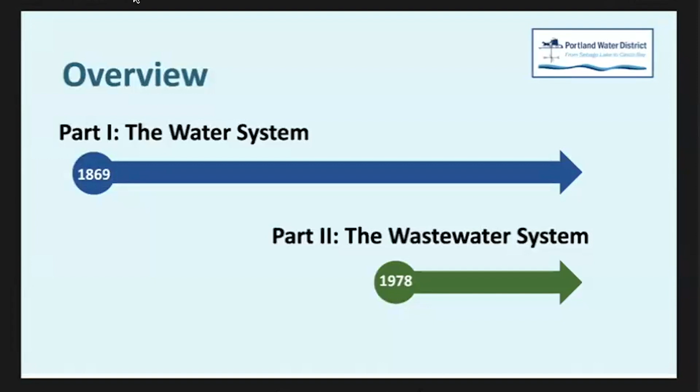Whereas the water, you'll see, started really being a thing in the 1860s. So here, I'll talk about our water system. The water system that we all drink from here in Cape Elizabeth originates at Sebago Lake. Raise your hand if you knew that your water is from Sebago Lake. That is so great, because we are so fortunate.

And by the time I'm done, if I do nothing else tonight, I want you to leave saying, wow, we have got the best water system. In fact, this is true. EPA was here 3 weeks ago to do an inspection, and they said there's nothing wrong, we just do this periodically.

It had been like 20 years since they had been here. They spent a week, 4 people, 2 from Colorado, 2 from Massachusetts, asking a million questions, touring everything. At the end, one of them said, 'I've been at EPA for 35 years. I've been all around the world. This is the best water system I've ever seen in the whole world.' So that's not me talking, that's EPA.

So I hope that I can convey that well enough so that you feel good about that when you leave. The history of drinking water in Greater Portland, if you go all the way back to the 1800s — we have newspapers in our archives, and you can read the discussions that happened.

By the way, it's amazing, if you ever read old newspapers, the debates they had. They're pages long, where people are conveying, this is my position on this, this is my position.

In the 1850s, Portland—and when I say Portland, I really mean the peninsula, that was really what Portland was, Deering was a separate community—the conversations you can read in the old 150-year-old newspapers were about the city of Portland having grown big enough on the peninsula that the water systems they were using, which were really like rain barrels and cisterns—you might brick up an area in your basement and convey the water off your roof down a gutter, a spout into your basement and collect water there, and that's the water you used—by the 1840s, 1850s, it was clear the population had grown enough that this was inadequate, not a great way to provide water for a community of this size.

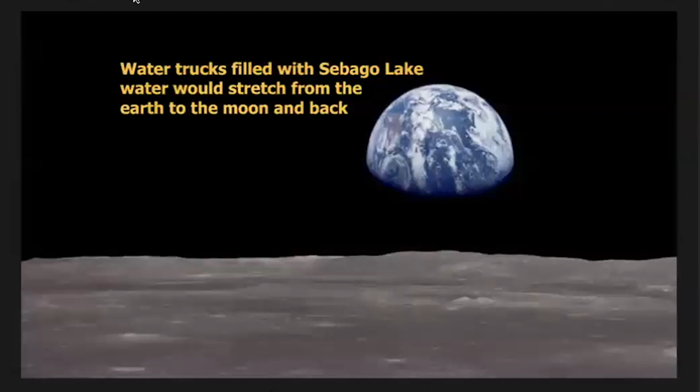And that seems like a big number, right? But it still doesn't really help me that much. I don't really know how much that is, I can't picture it. So what if you were to take all those trucks, 100 million of them, and line them up end to end? How far would it go? Now you can take a guess. How far do you think that line of trucks would travel? The moon - okay, that is a great guess. It would extend from the Earth to the moon and back twice.

So it's just an enormous quantity of water, and they were right in 1866: if we get the water from Sebago Lake, we will never be needing water ever. I'll tell you a little later about how much water is in reserve based on how much we use today. But if you ever pick up the newspaper and it says Portland struggling with water quantity, just know Armageddon has happened, because there's just no way that should ever happen. In fact, what will happen long before that is you'll be reading about Boston, Bangor, other cities looking to Sebago Lake for water. That will happen long before.

So that's not something we just never had. You can lay awake and worry about other things, but you do not need to worry about the quantity of water in Sebago Lake.

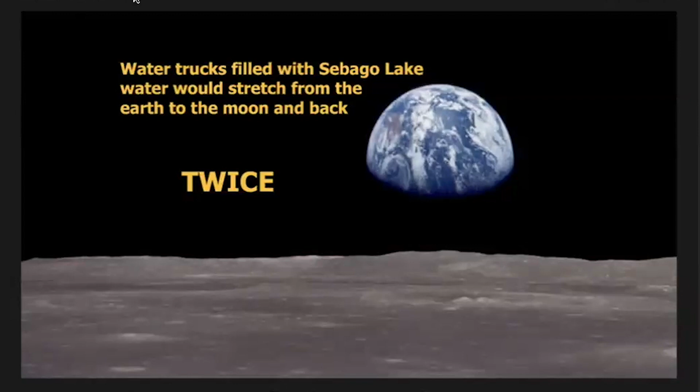When you're next at Bissell Brothers or one of those trivia nights, this is the best trivia question: when did water first flow from Sebago Lake into Greater Portland, and where did it go first? Here's the answer: it was Thanksgiving Day, 1869, and the first water tap was at 94 Danforth Street, which, by the way, there's still a building there, the same building is still there. Don't know why they chose that tap to open first, but that's where it happened, on Thanksgiving Day, which is, again, isn't that a beautiful bow on the whole thing?

Aren't we thankful? And by the way, one of the great things about working for a company that's been around so long is you have these ancient records. You can go up into the attic and your wife will text you and say, when are you coming home? Because you get down there, it's like a rabbit hole and you just keep on finding things.

And here is the first service card, these handwritten cards that tell you that this was a galvanized service, 3/4 inch, installed in 1869, 47 feet long. That's service number one - see the one up there in the corner.

We still have that card. And there's the building as it looked long ago. That's how it looks today. It's still there, and that service has been renewed a number of times. Again, that's more detail than you want to know, but there it is, the first water service in Greater Portland.

The first system that the Portland Water Company constructed—remember the fire was 1866—and the system started operating in 1869. So it took 3 years to build.

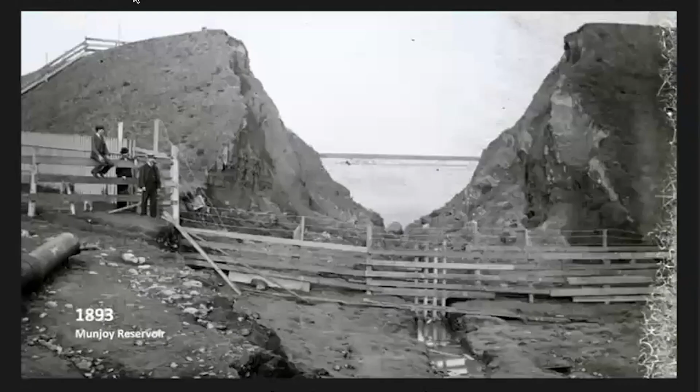So as I said, I feel bad a little bit for the poor Portland Water Company, but the most infamous thing that ever happened was the Munjoy Reservoir burst. This was in 1893, and it's a tragic story.

You can read about it if you Google it. There was a man walking along the base of this earthen dam, and he saw that it was leaking and getting worse, so he started running from home to warn people. While he was doing that, it burst and rushed down and washed away houses, including his own. Three of his family members were killed as he was running around telling other people to evacuate.

I was upstairs in the attic one night, missing dinner, and I found this ledger from the Portland Water Company that we still have—blew the dust off it. And I found this entry where they paid $6,600 to the family for damages, to settle claims related to this terrible tragedy.

You can just see it wiped out all of these buildings down below. It was rebuilt and refilled and used again for many, many years.

Okay, so that's the sort of the prehistory. I haven't even got to the Portland Water District. If you read the newspaper accounts around 1900, 01, 02, 03, there's a huge debate going on between advocates of continuing with a for-profit water company and others who said water is really a community thing. It really shouldn't be a for-profit thing. Why would anyone be profiting on drinking water? It should be owned by the public, managed by the public. And this debate went back and forth.

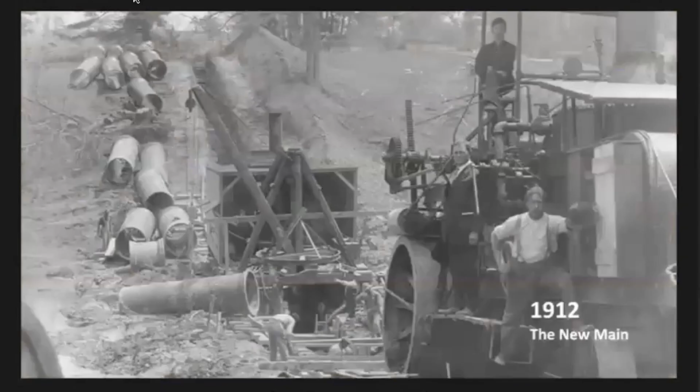But things are changing. Another irony, the water district was created because it was felt we needed to be able to fight a fire if it broke out. When the district took over and engineers evaluated the capacity of the system to move water, it turns out that the system could move about 10 million gallons in a day, and we used 9 million gallons as a community, meaning we didn't have millions of gallons in storage if we needed to fight a fire.

So it really wasn't adequate. One of the first big projects, which dominated the annual reports for several years, was the new main. It's referred to as the new main under construction. And this is a picture of the new main. It was finished in 1912.

It took almost 4 years to replace, or actually augment, the existing transmission main with this 42-inch cast iron main that went all the way from Sebago Lake into around the Capissic Street area. That's like one of the main trunks of the system.

Here's a picture of it coming through Gorham. Looks like Vienna sausages. I love this picture with all the lengths of pipe being dropped into this trench. The new main, by the way, we call it the 42.

And I say we call it that because you're still drinking out of it. This water main is still in service, still in great condition when we have to work on it. One thing I'm very impressed with is how engineers over the years really looked long-term and built things to last. This main is 112 years old, and we're still drinking out of it.

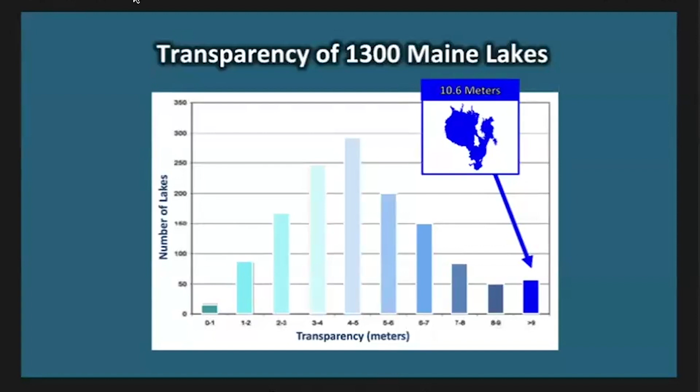Okay, so we do treat the water, but we didn't always. The Portland Water Company did not provide any treatment. It was just pure Sebago water from the lake into Portland. From 1869 until 1914, if you turned on the tap in Greater Portland, you just got Sebago Lake water. But in 1914, if you read the newspapers of the time, there was typhoid, there was cholera, people were dying. They had numbers on the front page of how many people died since the last edition of the newspaper.

It was never shown to be linked to drinking water. Milk was really the culprit, that's what the public health specialists of the time concluded. But you didn't really care that much in 1914, you wouldn't want to wait around for the debate. If you buried one of your children, you want something done. And so it was determined we should disinfect the water, we should add chlorine. So that began in 1914.

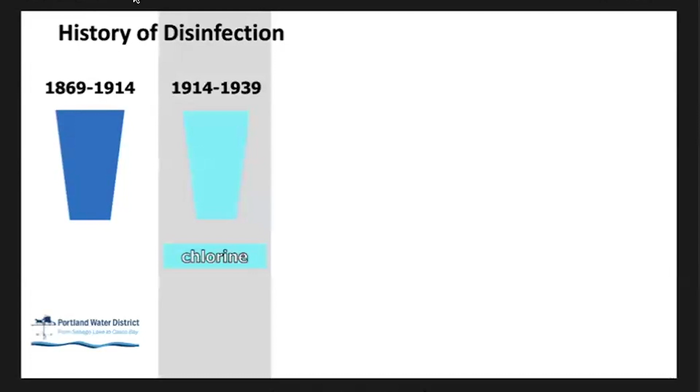From 1914 until 1939, chlorine was added to the water. In 1939, that changed. The treatment was upgraded and we started chloraminating, which is chlorine plus ammonia. You add both of them, they combine together. It's a more powerful disinfectant, has less taste and odor, and it lasts longer in the distribution system. So that's why we switched to that.

Many communities are switching to it now, but we were very early in doing that, in 1939. From 1939 until '94, that's what you got when you turned on the tap, chlorine and ammonia as your disinfectant. In '94, the regulations changed.

We learned that our system needed to be upgraded because of what they call emerging contaminants, new things that we didn't know about that are found out about, learned about, and then regulations change and they say, what you're doing has been good so far, but you need to do more.

So in '94, we added ozone disinfectant to the system. Now the water is pulled from Sebago Lake, we ozonate it, and then we still add chlorine and ammonia to carry through the system. That's how it was from '94 to 2014.

Then in 2014, we upgraded again for other emerging contaminants, in this case cryptosporidium. By the way, we've never found cryptosporidium in Sebago Lake, but EPA regulations say you must treat as though it's there. Because if we waited, you might ask why spend a lot of money to make your system more robust to treat for something not even in the source. It's because if we wait around until it's in the source, you will drink it and you could die. Some of these are waterborne diseases that can kill you.

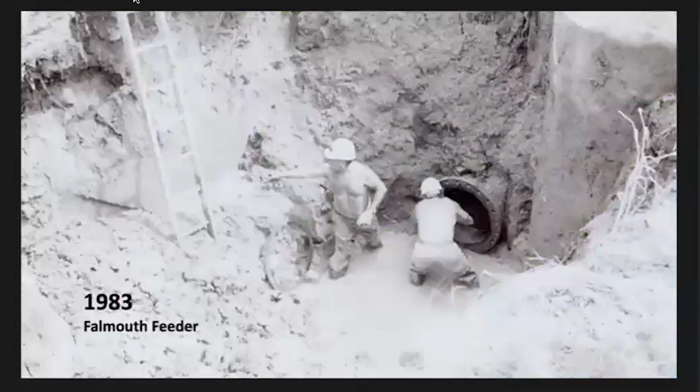We're still doing the same things that were done 100 years ago, but we have better tools now. How many years ago is this? 40 years. That's not acceptable anymore as a construction practice—they would be bracing in there, there'd be other things done. But in 1983, that's what working on the Falmouth feeder looked like.

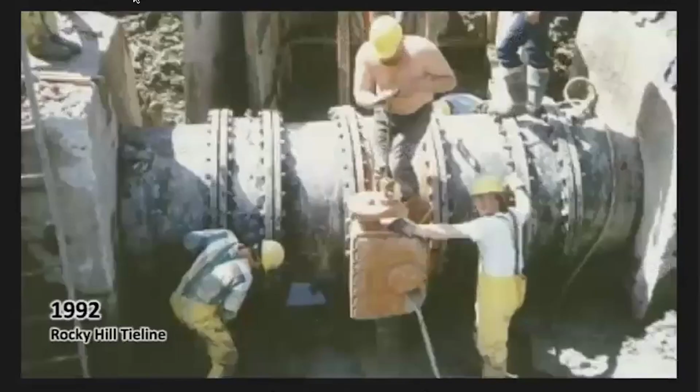This is the largest water pipe in our system—it's 60 inches in diameter. It's what we call the Rocky Hill Tieline, a pipe that connects. I mentioned we no longer use the Bramhall Reservoir, which has been paved over, and the Munjoy Reservoir, which is gone. Now our major storage is at Rocky Hill and Methodist Road in Westbrook, and this is the pipe that connects those storage tanks to the transmission main, so when you turn on your tap, you get water from here.

A big project we did in the 80s was in response to complaints about algae. In late summer people were turning on the tap and seeing green algae. We looked into it and learned that our two intakes into Sebago Lake, which pull water from the bottom, were in about 35 feet of water. The lake's transparency is such that light can get down even further than that, so algae can grow at that depth, and in late summer we'd draw in water with algae. It wasn't harmful, but it wasn't aesthetically pleasing. So we floated extensions out there and ran them out deeper into the lake, and now we draw our water from 85 feet instead of 35 feet. We haven't had an algae complaint in 40 years.

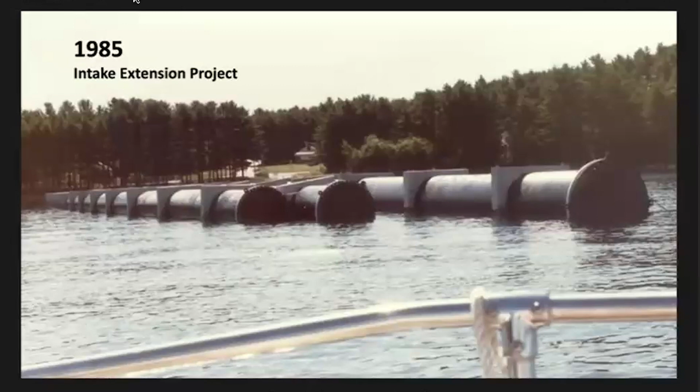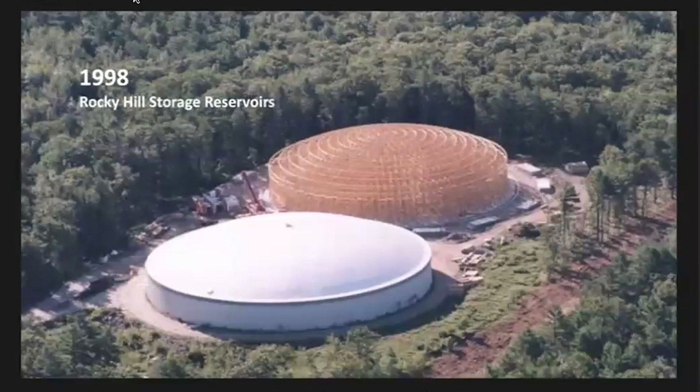This is an aerial image of the Rocky reservoirs, Rocky Senior and Rocky Junior—again, engineers named them, so they're not that creative. Each one holds about 9 million gallons, so that's 18 million gallons total, and we use 22 million gallons in a day. That's just a little bit less than a day's worth of water—that's how much we consume every day.

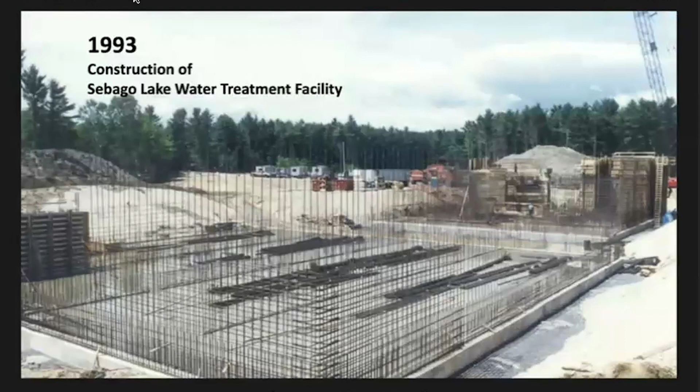So the last thing I'm going to share with you, I looked and looked for something very unique in Cape Elizabeth's water system history. Didn't really find anything that stands out, which is good. You don't want exciting water, right?

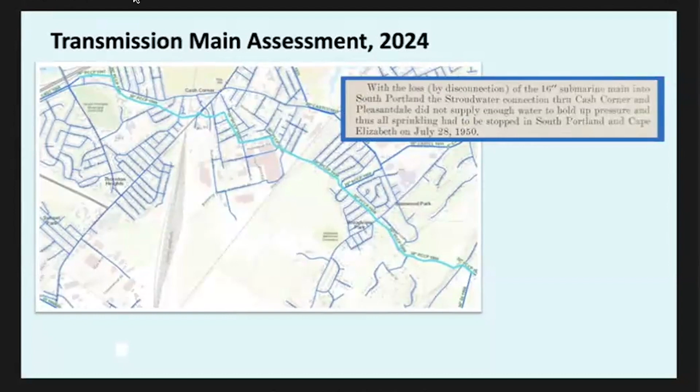That submarine main failed and had to be removed. The engineers ordered the district to remove it from Portland Harbor. So we replaced it with this one in 1949-1950. Notice this right here: Cape Elizabeth had to have water conservation that year because we just didn't have enough water. You have to have a big enough transmission main to meet the needs of the population, so this main was put in to solve that problem. It's been there now for 70 years.

If you have a car like I do, and mine's not that new, I'll drive it till it breaks down, call my wife, she'll pick me up and drive me to work for a few days, then I'll get the car fixed. But you can't really do that with a water transmission main, or it's very unwise, because if this thing fails, we might be out of water for a couple of weeks, could be months, who knows. So you want to be proactive and make sure you don't use things until they fail.

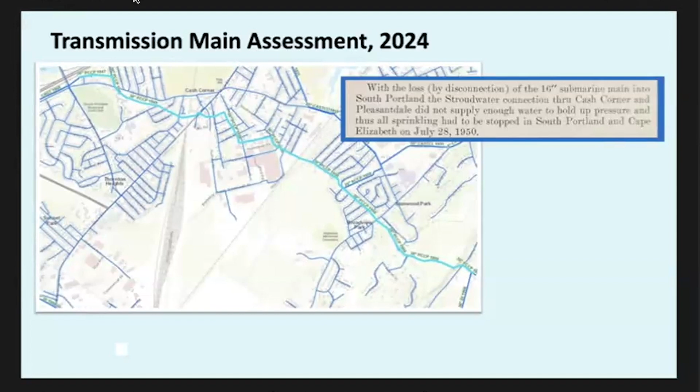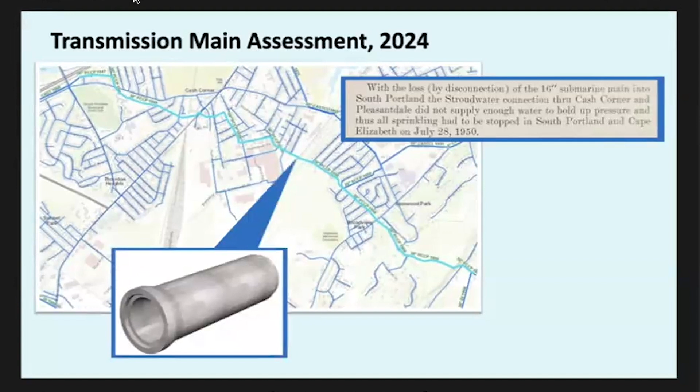So this month, and you might read about this in the paper, we're going to inspect this main and see: should we replace sections of it? Should we do something, or is it okay? By the way, this is a picture of what it looked like being installed—this is 30-inch reinforced concrete pipe. Again, it's been there for 70 years.

What we're going to do, and we've never done this before, is inspect it while it stays in service, otherwise we'd all have to go without water for some period of time. First we'll put what's called a PipeDiver through there, using the water—it'll be disinfected and run along the whole length of main. This concrete pipe has wire all the way through it, and the PipeDiver can detect if the wire is broken, which is like the beginnings of deterioration. We'll get a report about that.

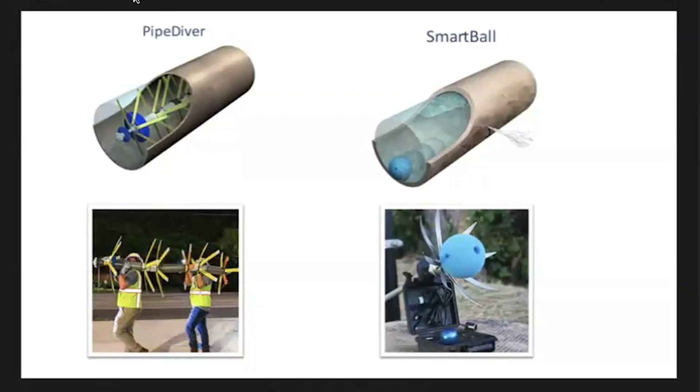Then the second thing we're going to do is run this thing called a SmartBall through, which also has electronics in it and can detect leaks—it can hear leaks. If it hears one, it'll tell us exactly where it's leaking underground, so we can dig that spot and fix it. We haven't done this before. It's going to happen starting September 30th, that first week of October. Hopefully nothing happens and there's no big story, though there might be some traffic disruption.

That is the end of the water part of my talk. I'm happy to answer any questions if you have some. I think I saw your hand first.

Where's the intake? It's Sebago, and is there any redundancy built into the system?

You must work in the water industry. Redundancy is probably the most important thing, because I can live without my car for a week—I'll be irritable, I'll hate waiting for Uber, but it's no big deal, I'll still get to work. But if we're without a water main for a while, everybody's life is a shambles. So you never want to rely on one thing. If you need 2 pumps to do something, you want to have at least 3, if not 4.

Our system is built with redundancy all over the place, including the intakes into Sebago Lake. We have 2 of them, named by engineers: the 25 intake and the 52 intake, so you know when they were constructed. They're both in 85 feet of water, and we can switch back and forth—we can draw water in both at the same time, or switch from one to the other. Everything in that treatment plant is doubled; we have 4 raw water pumps when we could really use just one. We just have double everything.

Which can feel like overkill until you need it, and then you're so glad that you have that other pump. So yes, we have two intakes and they're both in the lower bay of Sebago Lake.

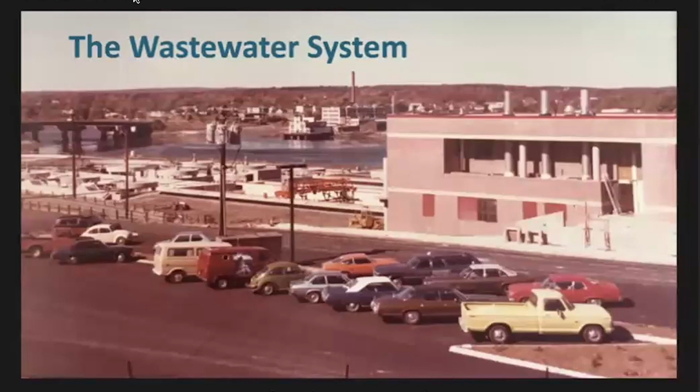First of all, 90% of the lake is completely unrestricted. You can swim in it, you can boat in it, you can fish in it, just as you could in any lake. But the lower bay, where the intakes are, has a no body contact zone 2 miles from the intakes, and then it has a no trespassing zone 3,000 feet from the intakes. So you can have no boats in the center of the bullseye, and you can have a boat outside of that, but inside 2 miles, but you can't swim, you can't touch the water.

And so people will say, wait a second, a boat is more polluting than a swimmer, why do you allow boats but not swimming? Well, first of all, we don't allow anything. This is the legislature that established these no body contact, no trespassing zones 100 years ago.

The fact is that a boat leaves a gasoline residue, but remember, gasoline floats and it wants to be in the atmosphere more than it wants to be in the water. So if there was ever enough gasoline in the water to make you sick, you'd know it immediately. We've never detected gasoline in the water because we're drawing it off the bottom of the lake, and again, it wants to volatilize and go into the atmosphere.

Whereas swimmers, if you've had a lot of people swimming, I hate to say this, but we shed viruses, bacteria, and pathogens, which if they get drawn in, hopefully we would disinfect them with our 3 disinfectants, but if they ever got through that, we could die because you could drink it and it could grow in your body and kill you. So human body contact is a much more concerning thing. Again, it would be better if there were no boats there, but the lake is big enough, we've learned, that it can handle some boating and still be the best water supply in the world, according to EPA.

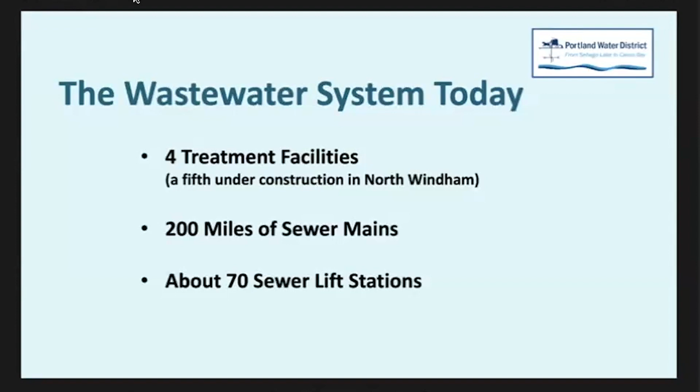You know what sewer lift stations are. You see them all the time, but you probably don't think much about them. So here they are, I'm going to show you.

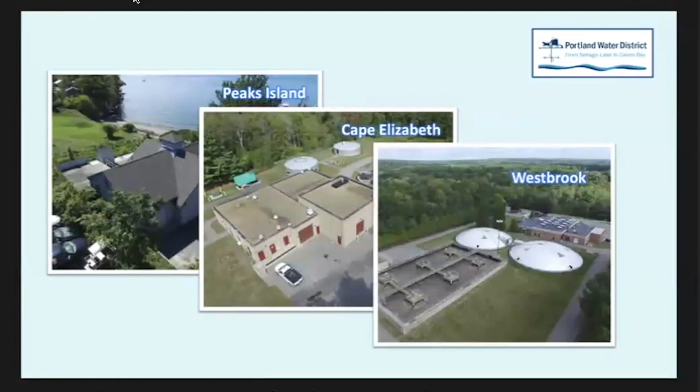First of all, here are our treatment plants. There's one on Peaks Island, it's award-winning because it was made to blend in with the community so it didn't look like a treatment plant. That's our smallest one. There's our Cape treatment plant that you know and love on Spurwink. There's our Westbrook treatment plant, the second largest one. And then there's the big Kahuna, the East End treatment plant, which is the largest one in the state of Maine. And I say we're constructing a 5th one.

The work of sewering all these communities and treating their wastewater in one of these 4 facilities really involved a lot of underground infrastructure that you don't ever see, but that was probably the harder part. One thing is to construct a plant like that, at least you can kind of fence off the area and do it, but how about going underneath all the roads? Well, things are happening, like Commercial Street in the Old Port. Imagine sewering that, but it happened.

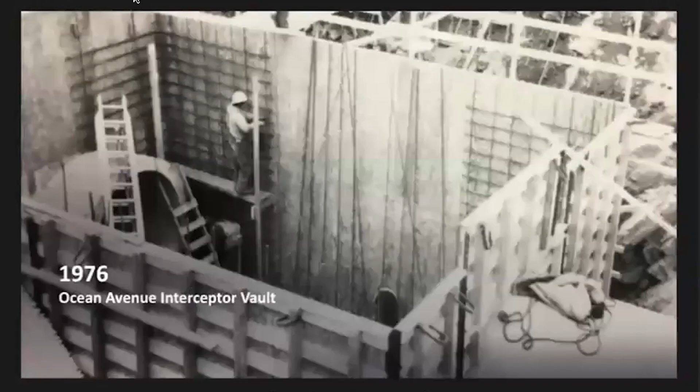So there's a lot of underground facilities like this vault. That's our largest sewer main, it's 72 inches in diameter. So this is like a street coming down here, and it's intercepting. This used to go right into Back Cove. And now it collects in this vault and then goes into this big main toward the treatment plant so we can treat it.

By the way, you might have noticed a construction project next to Back Cove that's been going on seemingly forever. That's the city of Portland, but we're partners, so they've had some challenges building that. What that is, it's basically a big basement to flood. What I mean by that is when you build a sewer system that's combined, Portland's system is a combined system, meaning it has sanitary wastewater from our homes plus stormwater off the streets.

So under normal conditions, you're flushing the toilet, you've got washing machine water and dishwasher water, and the system can handle all of that and bring it to the treatment plant. Then it starts raining, and what happens is it overwhelms the capacity of the system, and then it starts overflowing. There's 70 locations around that are called CSOs, combined sewer overflows, and they dump untreated wastewater into Casco Bay.

So what the city is doing is building these huge underground concrete reservoirs to flood, so that instead of spilling over into Back Cove, it'll fill this big vault, and hopefully it'll stop raining before the vault is full, and then you can bleed that back into the system over time. That particular one has been going on, they've had a couple of problems with the construction, but I wanted to mention it because people ask me all the time what they're building. It's basically a basement to flood. There's already a couple of them, and this is, I think, the third or fourth one.

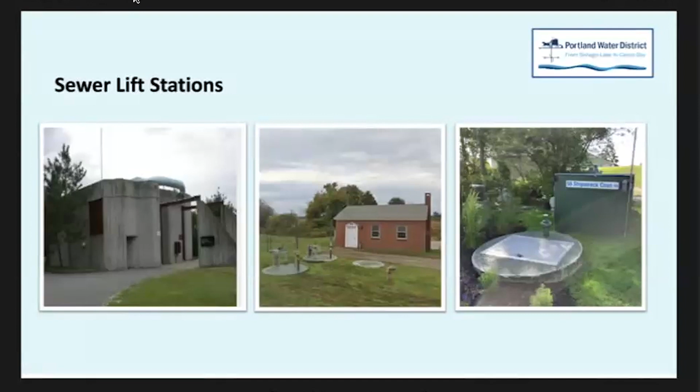So they're just like, this is in Shipwreck Cove, basically a catch basin. It fills up slowly, and then it reaches a certain point that clicks a pump on and pushes it to the next lift station. That one is on India Street. Next time you're in the old port, go up India Street. Doesn't look like much, but that thing is like 60 feet deep. That's the biggest one in our system.

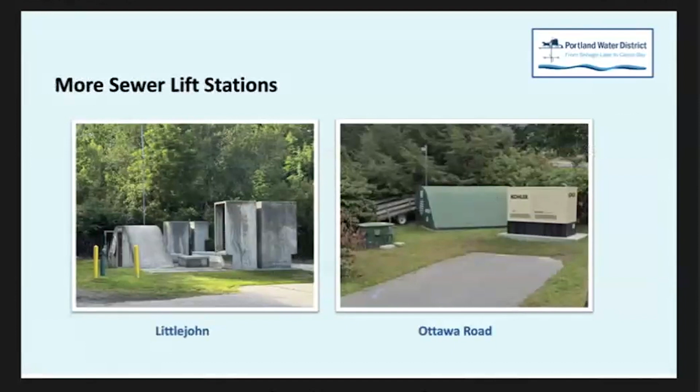This one is on Spurwink. You've seen that one, right? You see it every time you go to the dump. And that one's on Shipwreck Cove. This one's my personal favorite because it's like this brutalist art project on Littlejohn. And this one is on Ottawa Road. Anyway, all they're doing is gathering wastewater from our homes and then moving it to the next spot until it gets to the treatment plant.

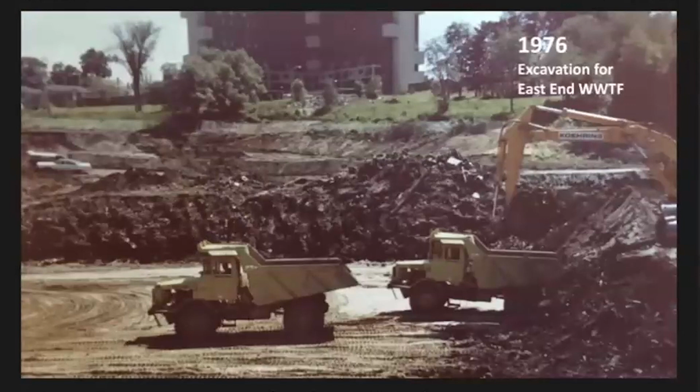This was when East End was built. First thing we had to do is excavate a dump that was there. This is an old picture I found of the beginnings of that project. Then we have the engineer looking out over his dominion here of all the rebar and concrete. By the way, I worked for the district for about 5 years in the laboratory.

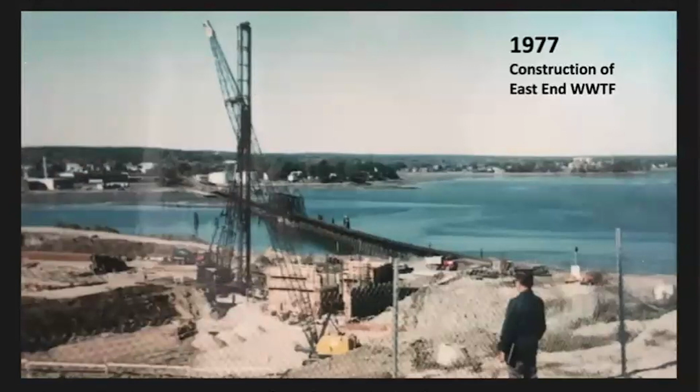And then someone said, have you ever been downstairs? I really had never been down in the treatment works. You go down, it's like an airplane hangar. It's so big, and my mind was blown because I just never thought that so much was underground. But once I saw it, I thought, of course you do that. You don't want to have to dig a hole every time you need to change the oil in a pump. You want all that stuff exposed.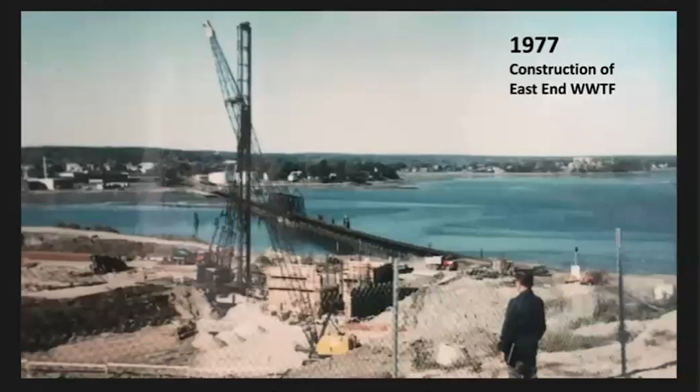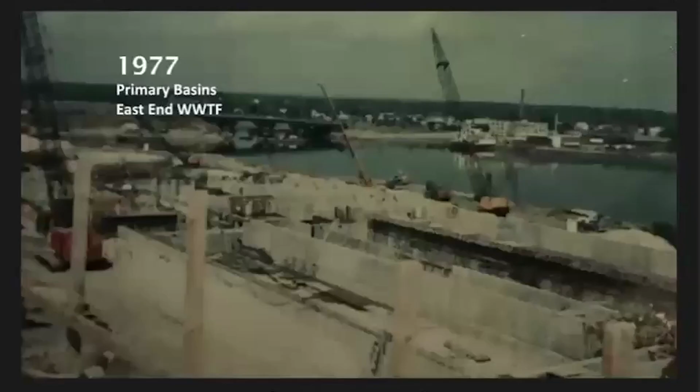So there's this huge area underground with all of our infrastructure. A lot of rebar. This is one of our clarifiers, those things that look like flying saucers from Tukey's Bridge. Again, here we're getting closer to the place being ready to open. For the first couple of years, those flying saucers didn't exist. It was open air, but that didn't smell that good, and we got complaints. So we covered the clarifiers.

So all that happens, by the way, and all treatment plants are kind of doing the same thing. Settling occurs in the first basin, aeration here where you bubble air into it so that bugs can eat the organic matter, and then you clarify it or settle it out, and then you disinfect it and it goes into Casco Bay. Good news is it worked.

Once that plant had been operating for a few years, water tests showed you could swim at East End Beach again. It still gets closed periodically, but the type of bacteria you can measure there after a rainstorm indicates that it's not coming from the treatment plant, it's washing off the streets. And that's what's causing periodic water quality issues that cause the city to either post the beach warning or close it.

Okay, so now I'm going to tell you about Cape's wastewater history because it's actually way more interesting than I ever knew. I've worked here for 25 years and I never knew the backstory. But this is a picture of Cape Elizabeth, and the sewer systems are colored two different ways because they are separate. You notice they don't connect.

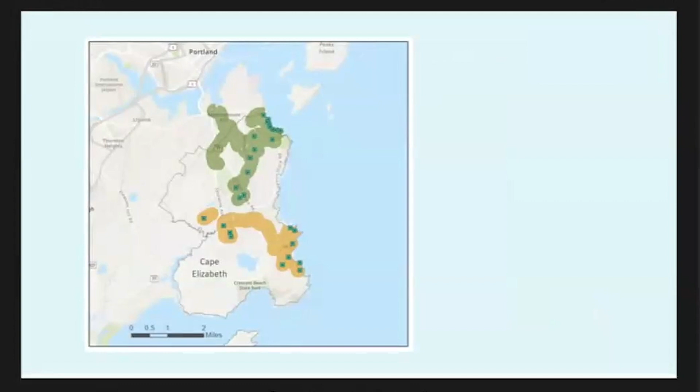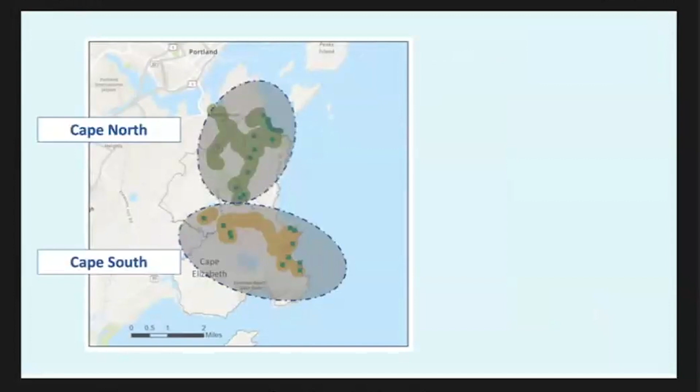Did you know this, by the way, that there's Cape North and Cape South? Well, now you're going to know. That's called Cape North, and we call this Cape South, and they are not connected. So if you live in the Cape North area, which I do, our wastewater does not get treated at that Spurwink wastewater treatment facility. It gets treated, guess where? In South Portland, just below the Casco Bay Bridge.

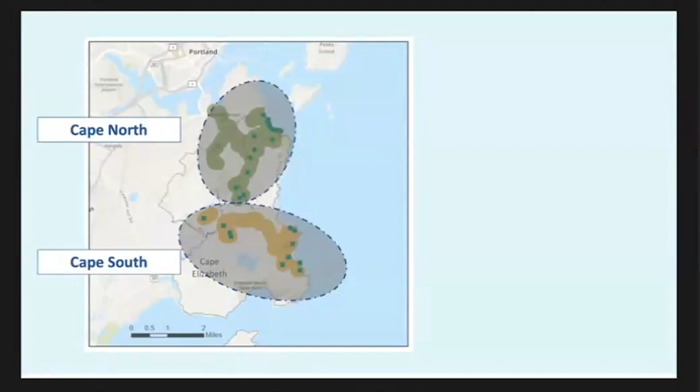And you might say, why would you do that? We're Cape Elizabeth, why don't we have our own treatment plant? It's really just about geography and hydraulics. It made more sense to send the water that way. So we pay South Portland to treat the wastewater from the Cape North system, that's where the treatment plant is. And then in Cape South, the treatment plant is at Spurwink. By the way, isn't it a little odd that in Cape South the treatment plant is way up here, but it discharges into Peabbles Cove?

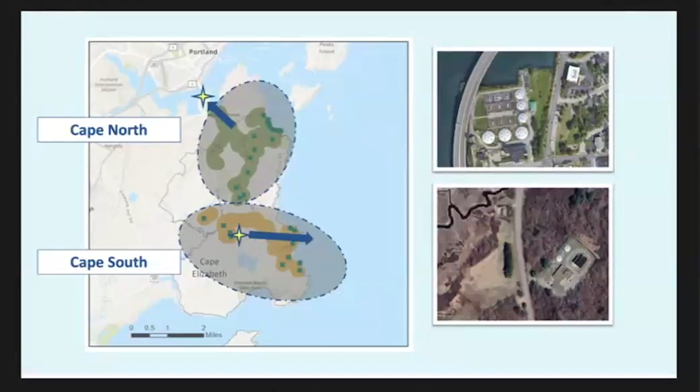I wonder why that is, I probably should cover that. Another interesting thing is that the Cape North system started operating in 1975, but the Cape South system didn't start operating until 1987. I'm going to explain why that happened too.

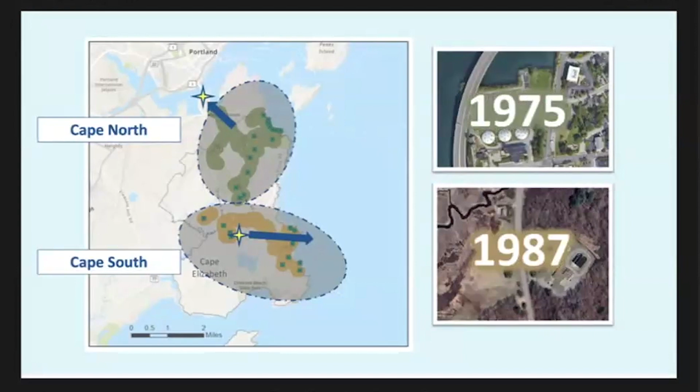So first, let's talk about Cape North. Essentially what's happening there, see all those green squares along the waterfront? Before 1975, all those roads were sewered, and it just went into the ocean, right? That's what you did, that was the plan. So that sewer system more or less existed in 1972 when the Clean Water Act was passed, but there wasn't any treatment going on.

It was just being conveyed to the ocean. So once it was decided, why don't we do something about that, it was pretty easy to envision, well if we just put lift stations all along the waterfront and push that water back toward the treatment plant being constructed in South Portland, we're all set. So it wasn't very controversial. It wasn't as expensive, by the way, as Cape South would be. So it passed pretty quickly, everyone agreed it was a good idea.

And so all those areas in green go to the treatment plant in South Portland, which sounds very simple, like no big deal, right? Well it's not always that simple, because those lift stations all along the waterfront, they're close to the ocean. And what do you think happens when we get a big storm? They flood sometimes. So it's not as simple as it sounds. In concept it's simple, in normal conditions it's simple, but we do have some challenges with those lift stations.

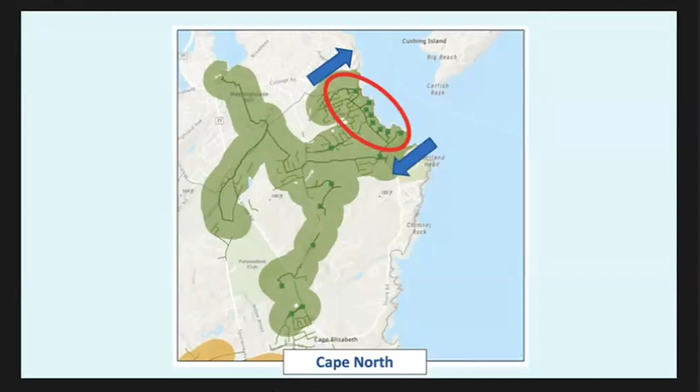But what they're doing is pushing the water back up to Shore Road, and it's all heading - I never knew this until I prepared for this - those streets all along from the Cookie Jar all the way down to Portland Head, that's all the wastewater being pushed up to Shore Road, along Shore Road to the Little John pump station, from where it goes all the way around the block. It kind of goes up like this and around, and then goes to the South Portland treatment plant. I never knew this, but that's the way the water flows. And then this wastewater flows down here, and it all goes there. That's how Cape North works.

And again, it was talked about first in 72, and by 75 it was happening. So what happened to poor Cape South? Why did it take so long? Oh, by the way, I told you that sometimes it's not as simple as it sounds to keep these lift stations operating when you're so close to the ocean.

So I'm going to tell you the Cape South story, and then I'm done. Okay, how many of you have been following the school story? Okay, everyone's chuckling, it's really the same story. And by the way, we chuckle about it, but what it is the confluence of money, what's best and what's feasible, and finding the solution that is acceptable to everybody. That's what we should do, that's what communities do.

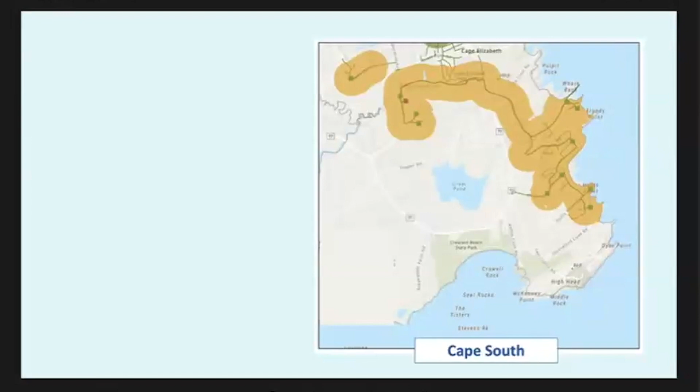If you measure, we have reports showing what the water quality was like. So the town manager, the district general manager, and an engineering firm all got together and said, let's propose what we could do here. And so it was proposed - I found this - and as you know, it's now treated at Spurwink. That's where it ended up, the treatment plant was built on Spurwink.

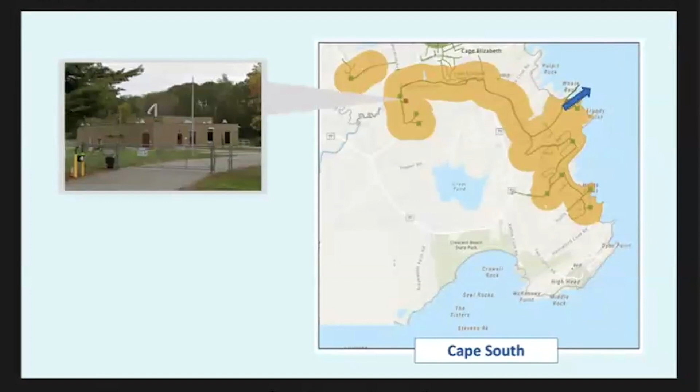And it discharges all the way out there, which is a little bit odd. So why is the plant way up there and the outfall way down there? And also, why did it take 12 years?

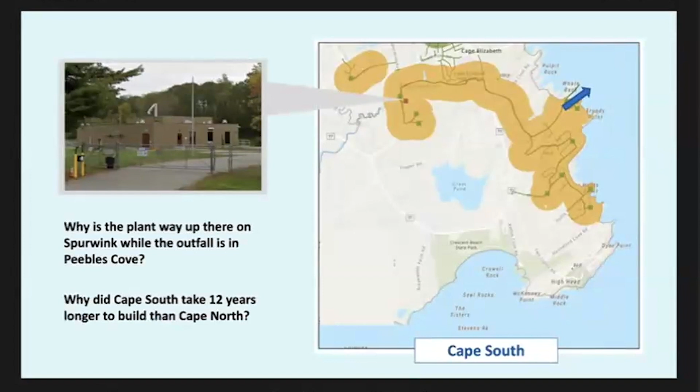Because it opened in '87, 12 years after Cape North was done. So here's the story. It started like this. Doesn't this look familiar? Can't you just picture it, a public meeting with the district, the town manager, an engineer saying, all right residents, here are the options and here's how much they'll cost. I have this transcript I found a few weeks ago upstairs in the attic. It's like 60 pages long.

If you read through the transcript, there were essentially 3 objections. One was, what's wrong with our septic systems that we have? They seem to be working okay. You can't really see a failing septic system as long as the water is going underground. So it was sort of like, we're happy with the way it is. It's too expensive. And another objection was, it'll be ugly.

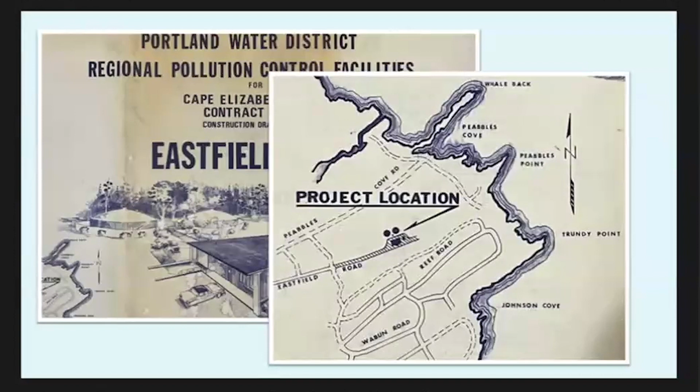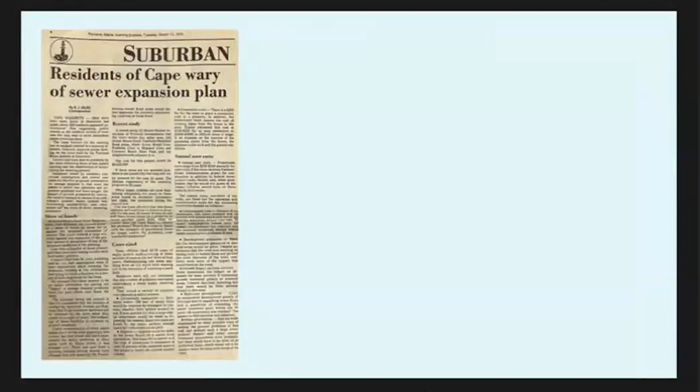Well, anyway, they didn't accept this proposal. Now I'm going to show you a bunch of headlines that were in the paper from 1978 when this was proposed until '87 when the plant on Spurwink opened. See if this doesn't remind you of the school proposal.

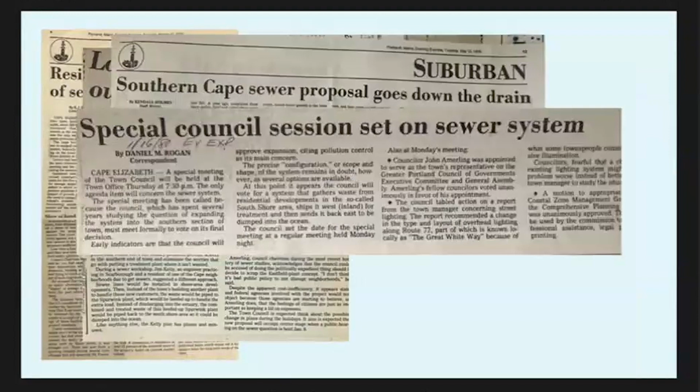So by now we're at 1984. This is 6 years later, and there's a new proposal, the Spurwink proposal. How about if we build the plant here and sewer these areas, but not those areas? So it was like a compromise, which is exactly how communities are supposed to work, in my opinion.

Eventually there was a vote, and the vote was affirmative. The people who were most vocal in opposing it said, okay, everyone, the community now seems to want this, I withdraw my objection. The final vote was 1,225 to 790. Let's build the plant at Spurwink and do this plan.

So, it's sort of a little bit gnarly. How many years is that? 1978 to 1987, so 9 years. But the solution makes some sense. Yes, it's kind of odd to sewer everything uphill, treat it up here, and discharge it there.

But if you think of where the Spurwink plant is, there's nobody living really close to that, it's kind of community land around it. That's a good solution, I think, rather than having a treatment plant right on your street. Who really wants that? I never knew any of this history, and I haven't found anyone at the company that does either. This is just how communities are supposed to work.

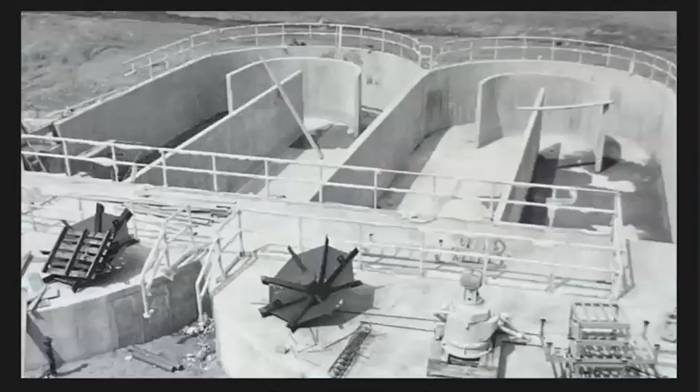Once it was voted and everyone agreed, we started building it. This is a picture of the plant under construction. These are called oxidation ditches, which is a form of aeration. And there it is, brand new. We were all young once.

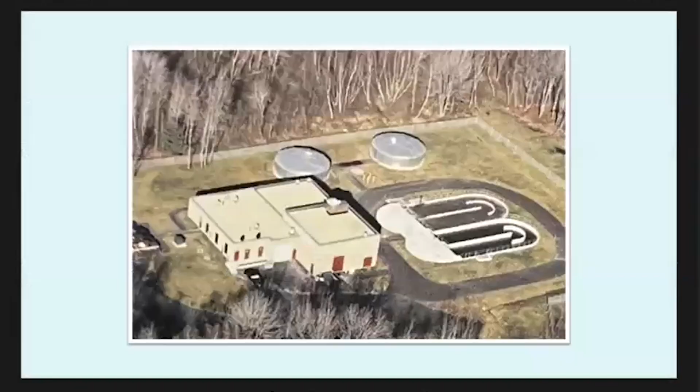That was what our plant looked like when it first opened. The open house was the next summer, and we've been treating wastewater there ever since. Now the plant has worked well. So that is the end of my wastewater part of the talk. I'm happy to answer any questions that you have.

The aerator is where you pump air into the stuff when the bugs come in and eat the waste. Eventually the bugs get filled. What happens to them? Well, then you generate what's called sludge. Biosolids is a happier term for it.

If you encourage bacteria to consume organic waste in a big swimming pool, which is what you do, then the bacteria are going to multiply. They're going to convert human waste into biomass, or new bug bodies. So you're going to have more bacteria, and then they accumulate, and you have to draw them out. You have to keep removing them.

So the Cape sludge, called sludge or biosolids, gets trucked to the East End plant where it gets dewatered. Then you have it dry, because it's really wet, almost all water. So then you dry it and truck it off.

We used to truck it off and spread it on farm fields. That's not popular anymore, so now it's going to landfill, and that has its own challenges. We're going to run out of landfill space. That's a challenge that all of us as community members are going to have to wrestle with in the coming years.

For many years it was spread, and that was the industry standard — this is a soil amendment, it has nutrients in it. But since then there are health concerns, PFAS-type concerns that have been identified, so that's not very popular anymore. We don't do that anymore. Now we landfill.